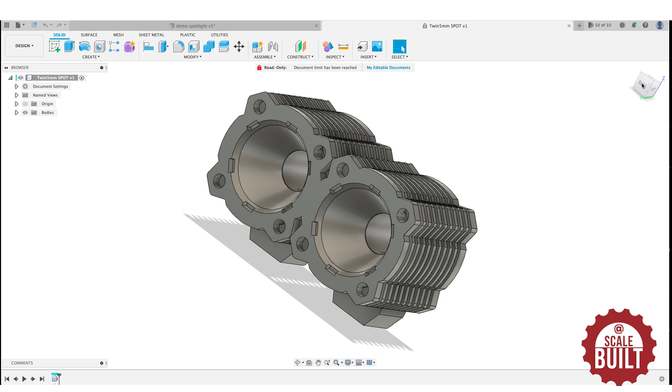Hi, so a few people have asked for some tutorials to make items in Fusion 360 that are specific to a remote control crawler. So I'll start with doing something similar to a spotlight, like this one that I made a while back.

So the easiest place to start is with the LED itself. This is a 5mm LED. I didn't make this file, it came off GrabCAD, and pretty much all 5mm LEDs have the same kind of dimensions, so it's a good starting point. So I'll import the LED file into the document as a reference point for later. But if we hide that...

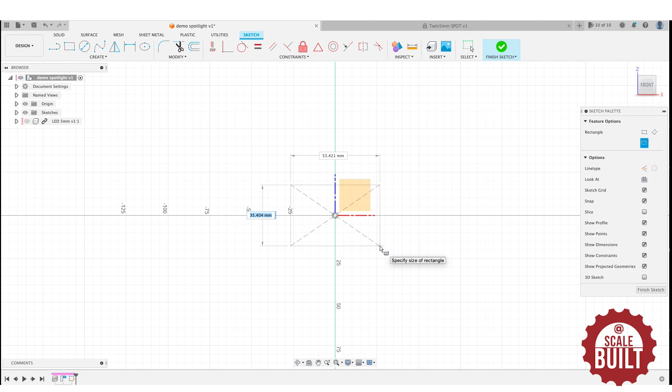What I'm going to do is start with just a rough idea of the housing. I'm going to create a sketch on the front plane, starting from the origin. We'll do a center rectangle, and we'll make that about 16mm squared ish. So you can see there's the LED just for scale.

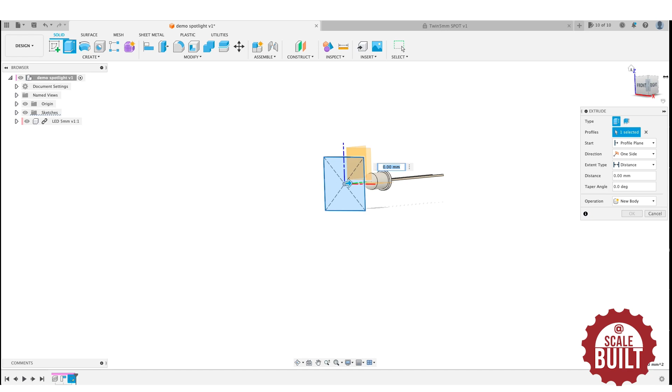What I'm going to do is extrude the box. We can always change bits of this later on anyway, so let's make it a bit less than that, maybe 15.

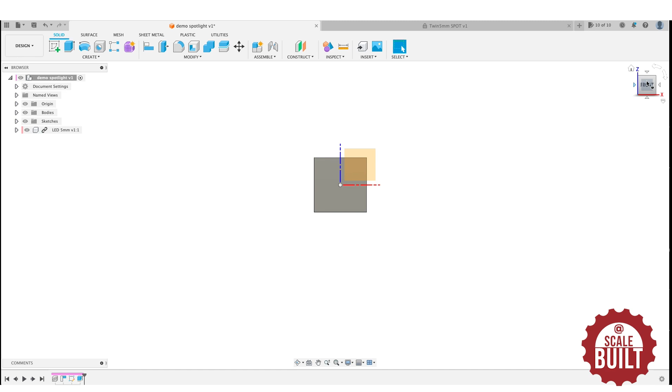So I've got the solid to start with, and then we want to give it some shape. I could have done this in the original sketch, but I'm just trying to do it as simply as possible, starting with a nice little block. I'll do another sketch on the block, and try to make it have some shape to it.

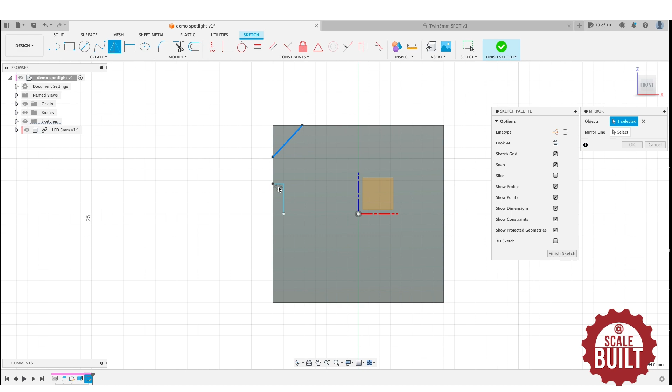I'll draw a line there. We're going to mirror all these things, so I only need to do this in one place. Right, so let's do a mirror of this, this, this, in that line. And let's do a mirror of this, this, this, this, this, and this in the horizontal axis.

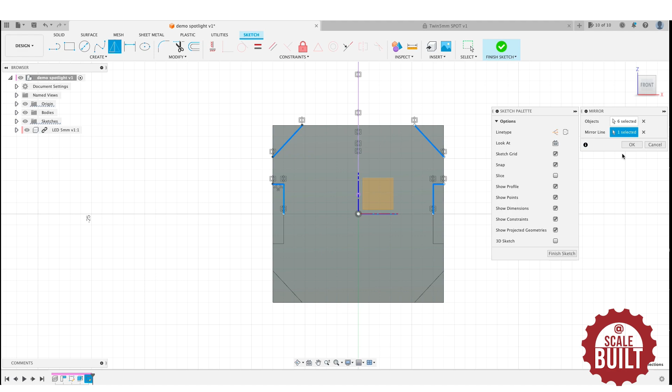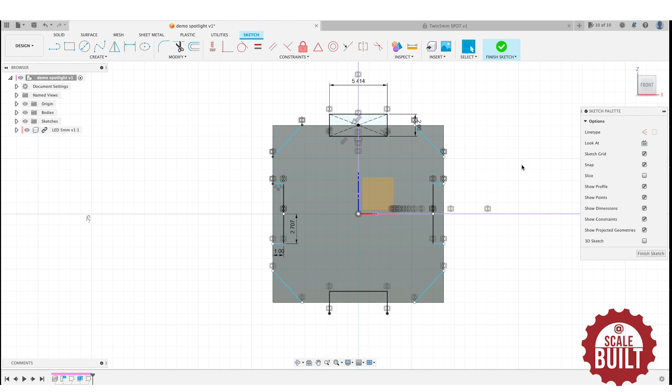We could do with that cutout up here as well. So if I get some dimensions, do a mirror. Oops. In the horizontal, got those. And then we can extrude all these cutouts.

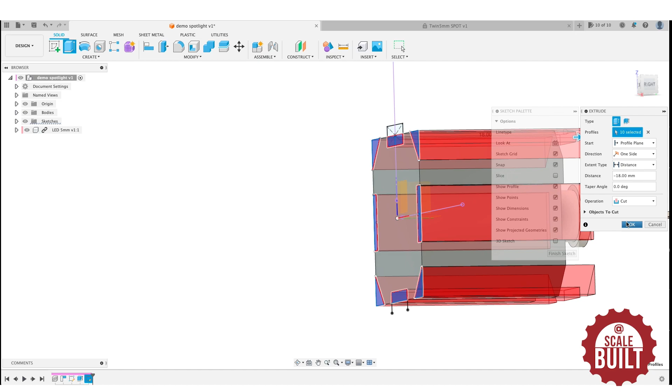It's got a little bit of shape to it now. And then what we're going to need to do is start making the cone cutout for the light to sit in.

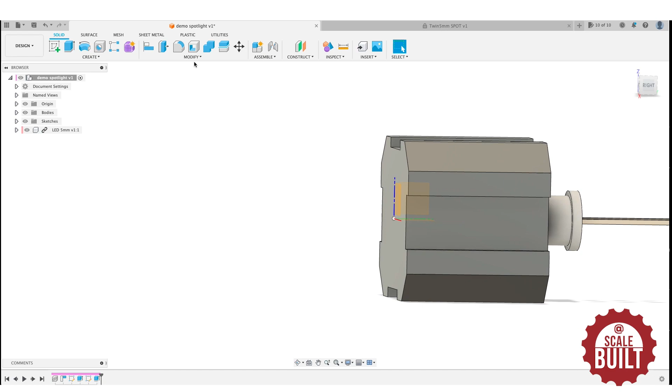So this is where it gets a bit trickier, and the easiest way I've found to do the cones and things for the reflector is to use the revolve tool. And for the revolve tool to work, we have to split this body in half. Well, you don't have to, but it's easier. So if I go to modify, split body, this is the body I'm going to split, and the tool I'm going to use, if I hide the body, is this plane that's on your origin here. So that one thing we made is now 2.

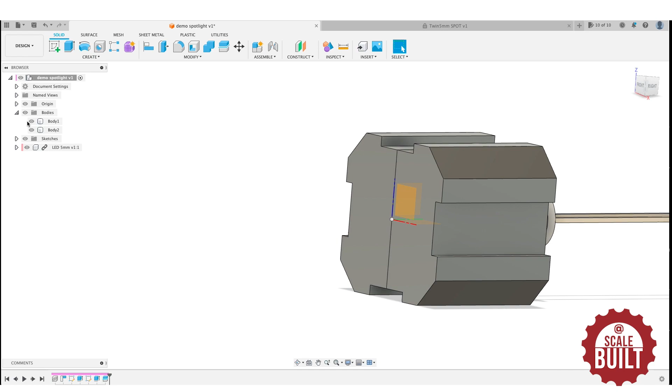And this is where I can start to roughly position where I'm going to have the LED. So if I move the LED, I'm going to want the LED to sit around there. So we're going to need to have a cone shape that comes all the way down here to where the flange of the LED is.

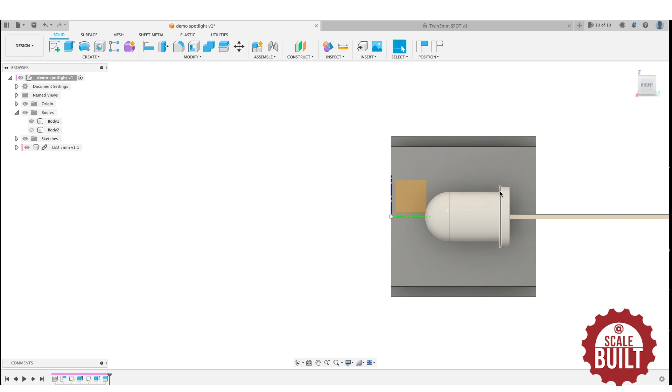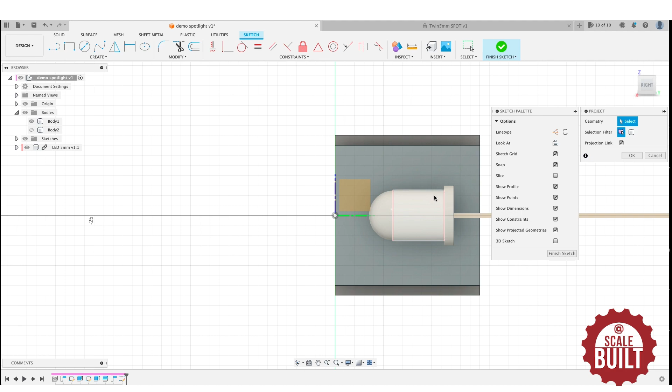So I'm going to do a sketch on this inside face of the housing to capture the positions. I'm going to project onto my sketch. Project just gives you an exact location of where other things are. So if I hit P on the keyboard for project, I can click on this bit of the LED and this bit of the LED. So I've now got on my sketch all these points which are representative of where the LED is.

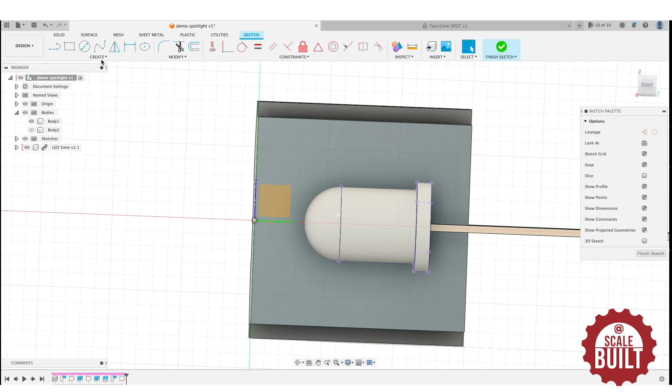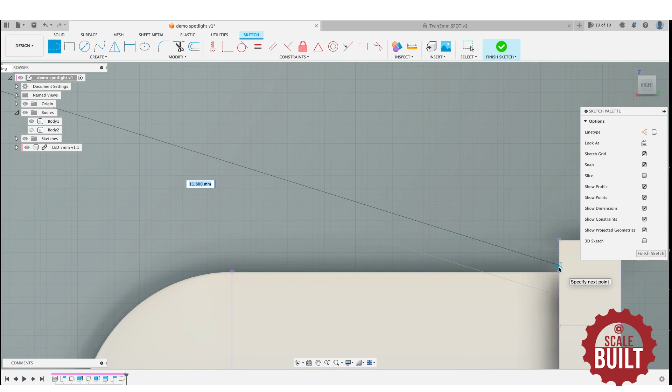And then I'm going to draw some lines. So here is the outside of the housing. If I start around there, and I'm going to want to come down to where these meet, but I'm going to just go out a little bit to have some wiggle room for the LED when I'm installing it. So click there.

Then I can hide the LED. I'm going to bring that down to there, to the midpoint. Click. Come to there. We don't need to, but draw a line there.

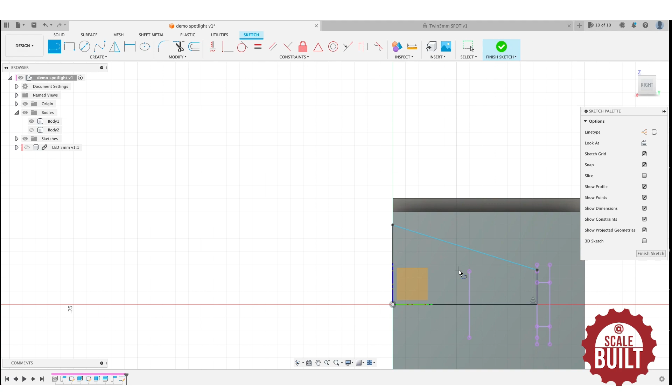So we've now got this shape here, which we're going to want to revolve around the x-axis. So when I finish the sketch, then do create, revolve, select the shape, and it's going to want to know what axis am I revolving around, and it's that one. Click that, and it does a revolve all the way around, and I've got it set to cut, so the revolve is going to cut into the existing body like that.

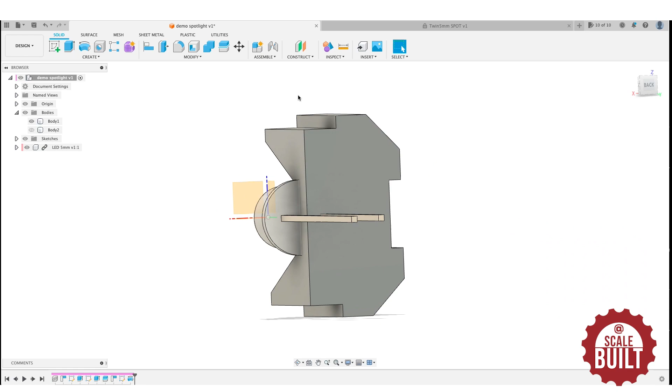Okay, so that's half of the housing at the moment. We're going to need to make the cutout next for the LED to actually slide into. So to do that, I'm going to do a sketch on the back, and I'm going to project the outer diameter of the LED.

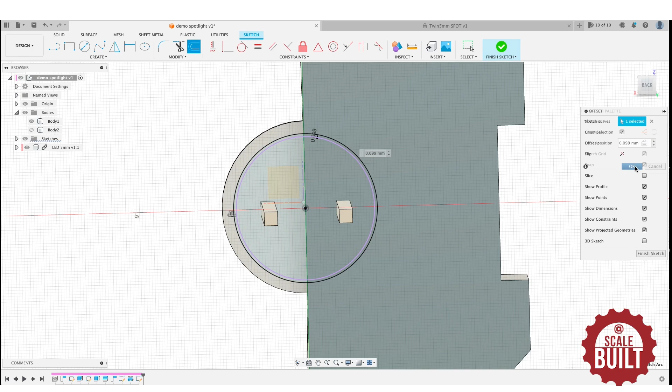So that is now an exact 5mm hole on the back, but just to take into account any errors with when it gets 3D printed, I'm going to offset that 5mm just a little bit, so I've got a little bit of wiggle room for when the LED goes in, like that. And then I'm going to extrude the slightly bigger circle that I've made.

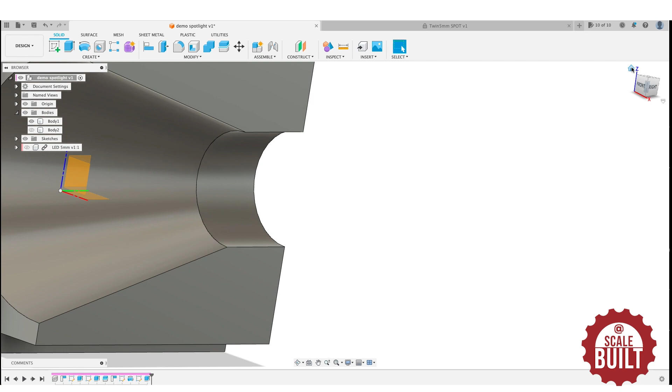Hide the LED, cut through the body like that. There we've got half of the light housing.

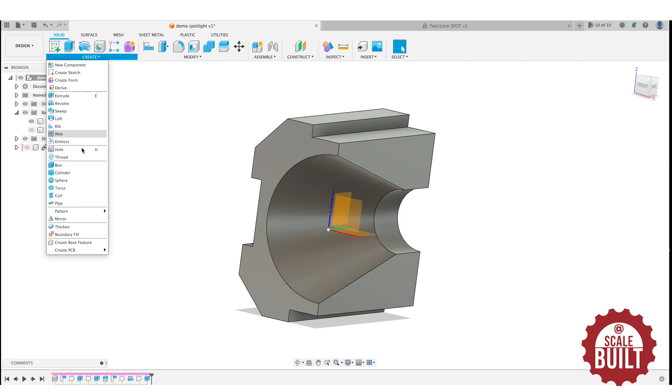But the other half obviously hasn't had that revolved onto it. So I'll hide the other half, and then I'll create a mirror of this body, select the plane, in that plane, join, and it makes a mirror image of that, so we've got the full housing there.

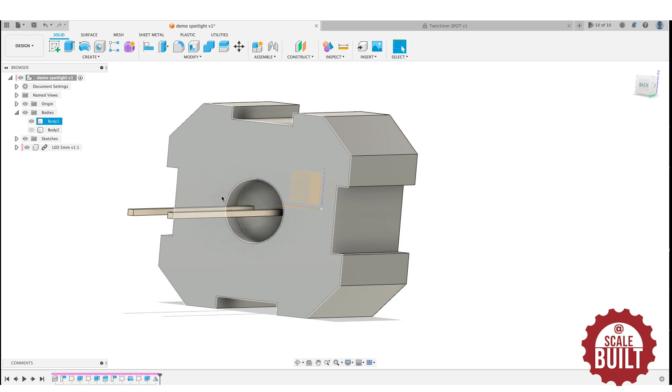Yeah, so the 5mm LED could go in there, but the LED obviously has a flange on it, and we want that to sit inside the body as well.

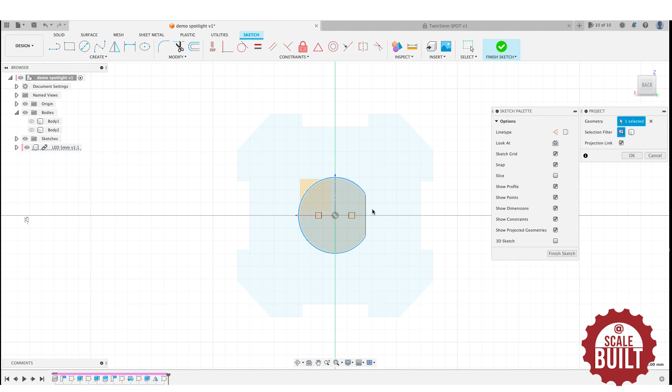So I bring the body back, I'm going to do a sketch on the back of the body. I'm going to project the outer shape of the LED, because I want that to sit inside when the LED gets slid in. I just want the hole to be perfectly circular instead of having this notch on it.

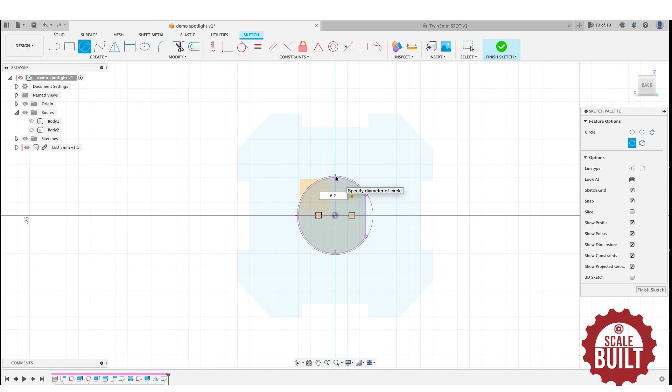So we'll do it to there, and that's 6 mil. So if I make it 6.2, so it's just a bit bigger, 6.25 maybe. Hide the LED. And then we're going to extrude this. I'm going to cut.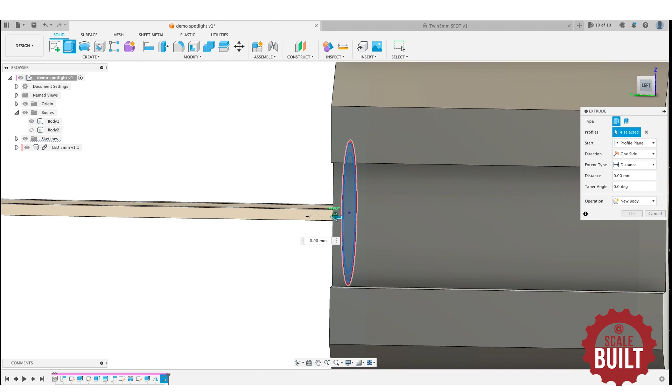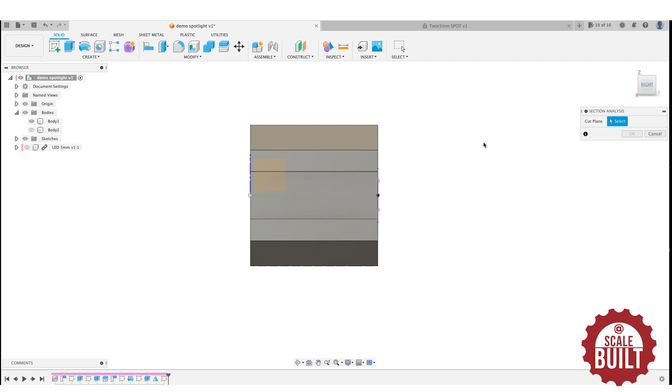Cut in just a little bit, but it's a bit hard to know how far we should be going. So what I should have done before I did that was do inspect section analysis, and section analysis lets you sort of look through an object like that. So it's not actually cut it, made any permanent changes, but it's letting me look through the middle of something. Okay, so we pull that back.

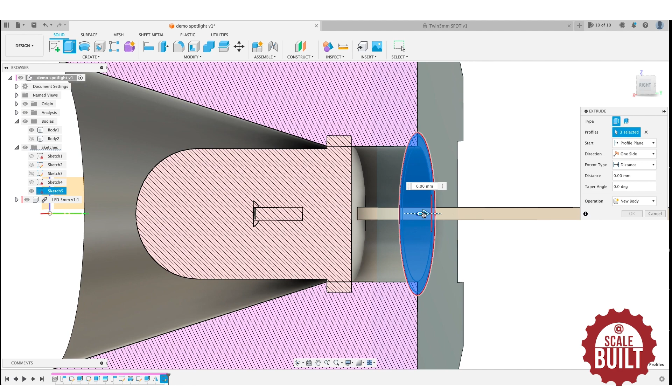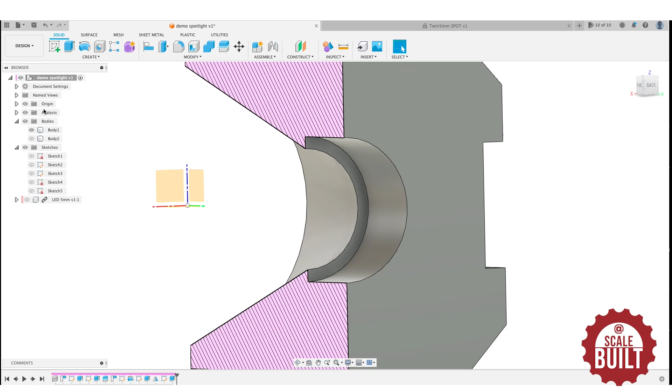We're going to pull it back to that face. If we hide the LED, we'll just be sure it won't cut that. So there you go. I can turn the section analysis off.

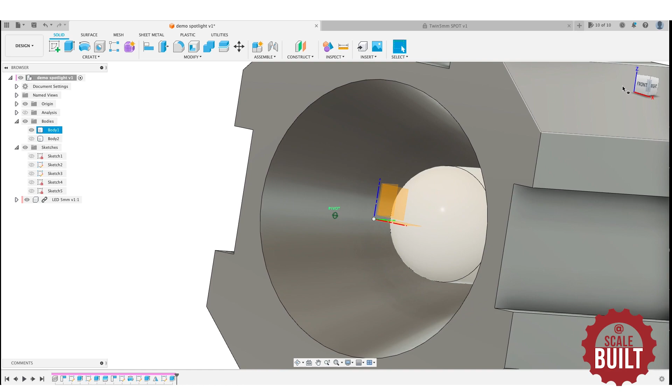So you've now got a bigger hole that the LED will slide into, and the flange will rest against this surface, and that's where the LED will poke through. Okay.

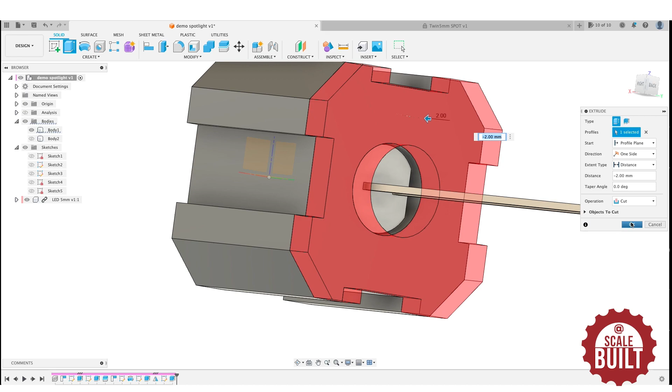If you wanted, you could reduce this gap here a bit. So we could go to extrude this face, and just pull it in a little bit, makes the spotlight a little less bulky, like that. And then what we can do is we can add detail to it if we want.

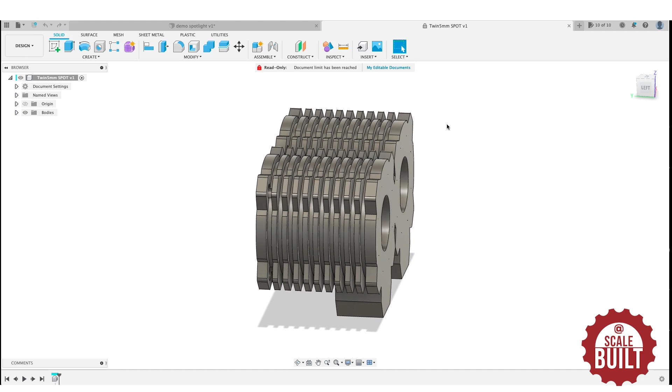So what's the best way to do that? We could make a separate face on here, or like we did on here, we could make cutouts to give it ribs.

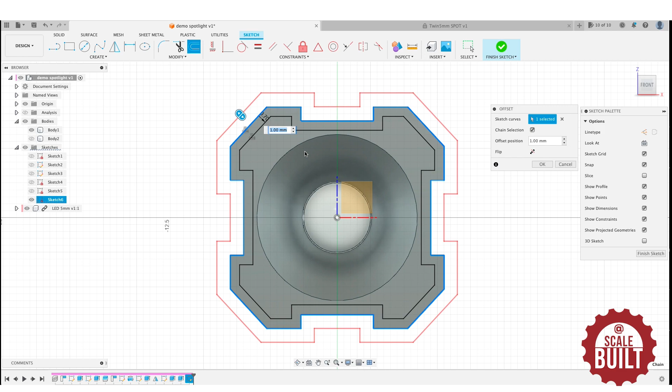So if I want to add some ribs on here, I start with a sketch on the front, then do an offset of this shape, going back about -0.7, meaning I'm cutting -0.7 into the main body. Then for simplicity, I do one that goes outwards about 1 millimeter, giving us this out shape.

What I could do is extrude this shape, making it 1 millimeter thick, and instead of joining it to the existing body, I'm going to make a new body. Then we can move a body, so I'll have the first one around there.

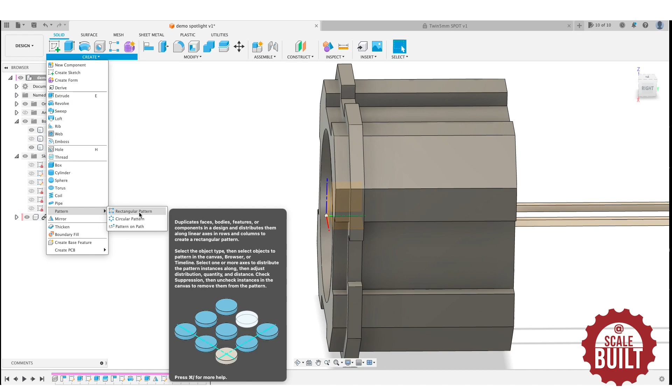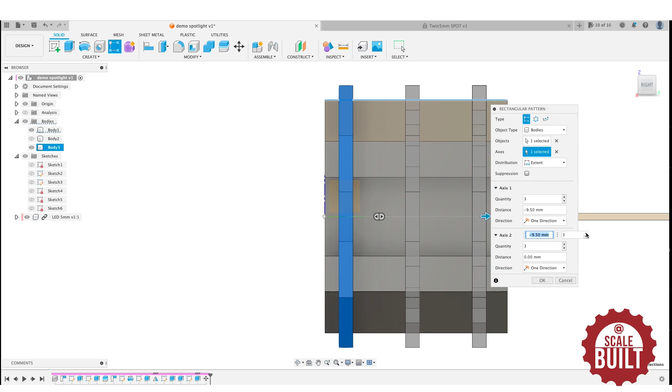Then create a rectangular pattern. I'm making a pattern of bodies, so you've got to select the body you want to pattern. The axis we're moving along is just any of them that go in this direction. How many do we want? Let's see, maybe 6 of them. So you've got those, which doesn't look too bad.

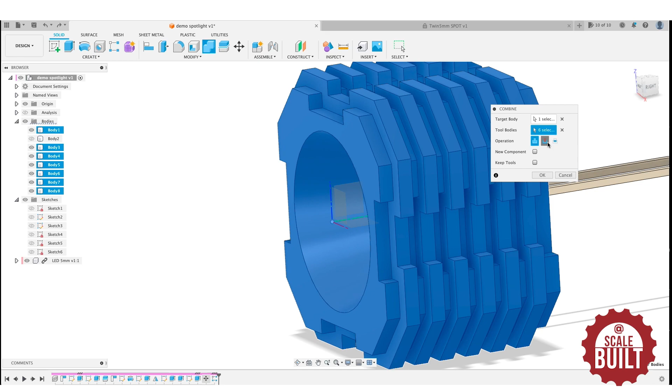But what I was actually going to do was use these bodies as tools to cut into the main body, taking these ribs away from it. So if I go to combine, the target body is this one, the tool bodies are all the ribs. What's the operation I want? I want to cut. If I press OK, there you go.

So that's the original body, the main housing, that's now had all those extra shapes we made taken away from it.

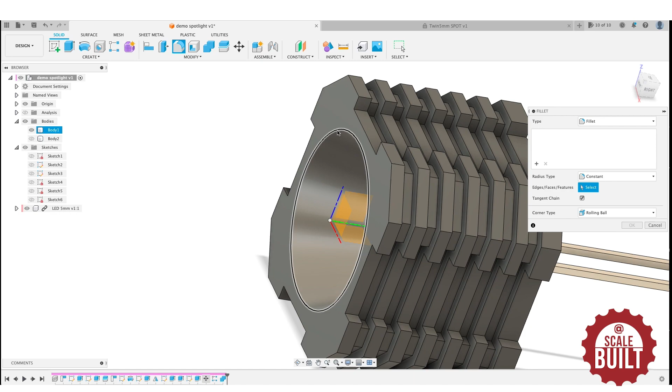What we could then do is give a little bit of detail to this front face. So if I round off this edge, I press the F key for fillet, click on there, and you can just pull this in a bit and get a rounded corner.

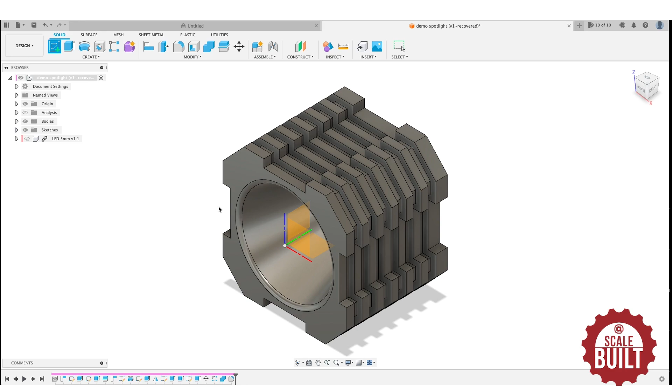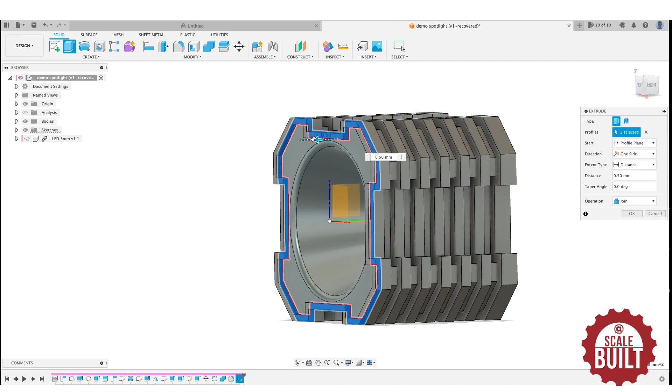So we'll add a bit more detail now to this face. If I do a sketch here, we'll do an offset to sort of give a little border. Hit the Q button to do a press pull on this, pull it out maybe 0.5 of a mil, and then hit F to do a fillet of that and round off the corners. There you go, that'll do.

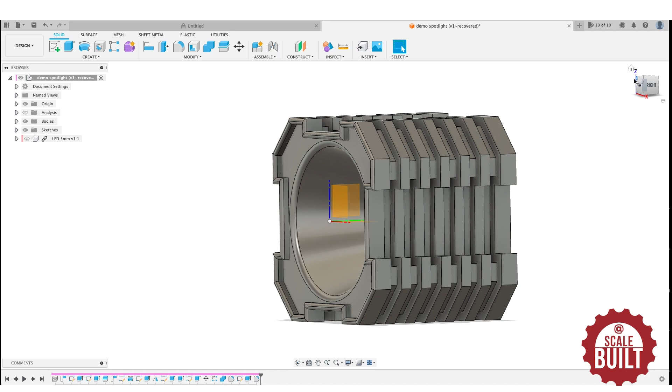So you got some rounded edges, and then we're going to add some pretend bolts here. If I do a sketch there, let's do a circle, somewhere around here. You could add loads of geometry to get it super exact, but it's so small no one's ever going to notice this. So let's make a bolt head right there, and add a hexagon inside to make like an Allen bolt.

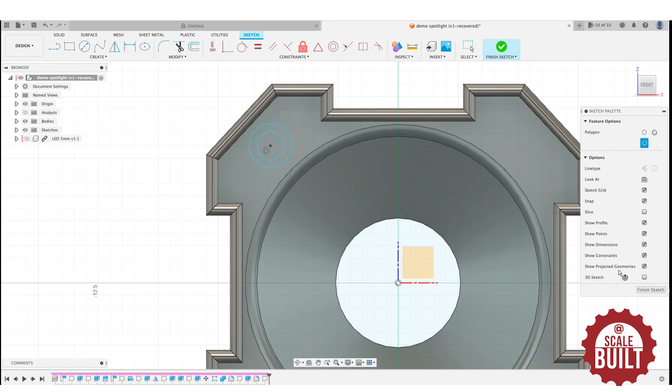Then hit the Q button to do a press pull. I'm going to pull this out about 1 millimeter. It's okay to do a join. So we've got one, and then a different way to mirror that is we want to do a mirror. We're not going to mirror a body, we're going to mirror a feature.

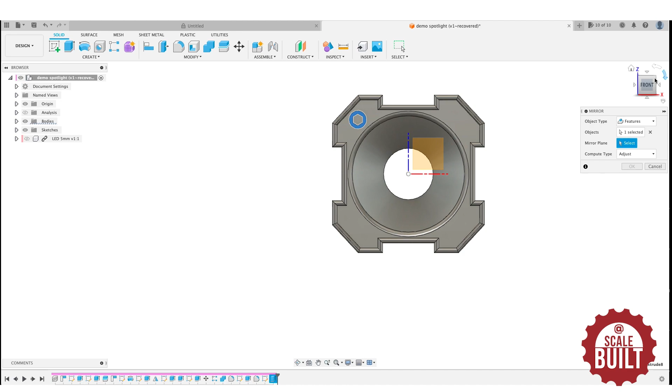The feature is on your timeline, this extrude, and we're going to mirror it in that plane there, so you get another one. Then we need to mirror both of those again in this plane. So create a mirror - again we're mirroring features, and the features are these two, the original extrude and the mirror, and we're going to mirror it in that plane.

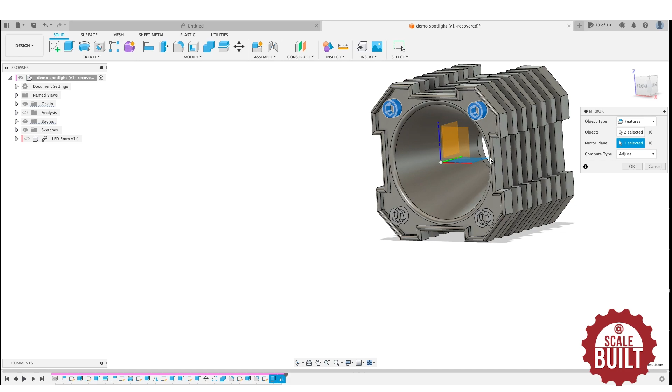Then we need to create some sort of plinth to let you screw this spotlight onto something. So we just hit save - Fusion crashes a lot, so keep saving.

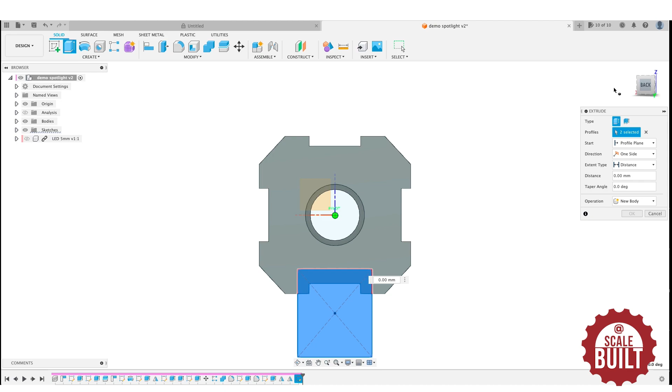So I'm going to do a sketch on the back. I'm going to make a rectangle along this axis, like that maybe. Do a press pull, let's have it going to there, and we'll make that a new body.

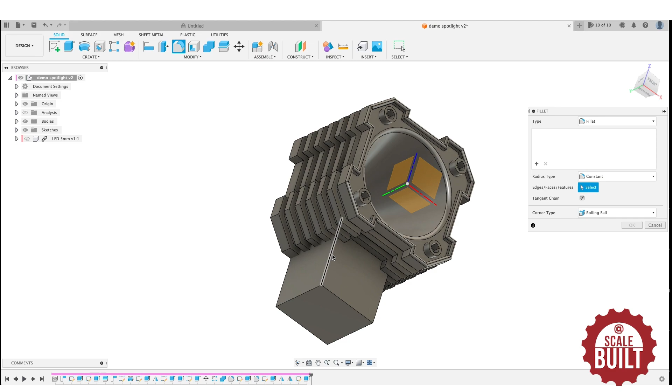And let's sort of round some of the corners. So F for fillet, click these two lines, the corners at the front, round those over like that. Should we do the back ones? We could do the back ones just a little.

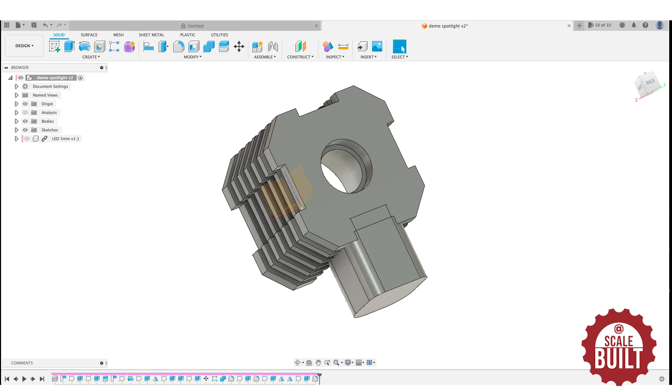Hit OK, we've got a little plinth. It's maybe a bit too tall, so if we hit E for extrude, click that face, and knock a couple of millimeters off.

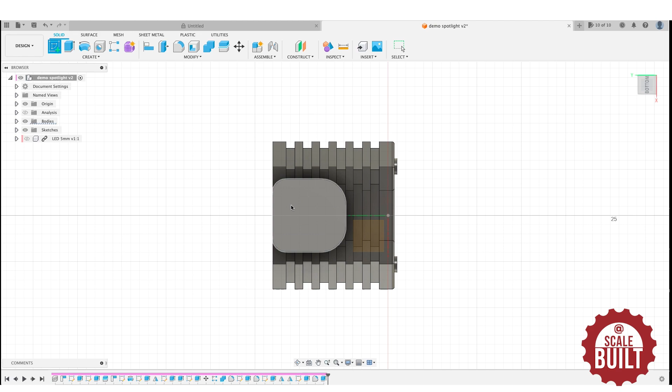And then we need to make a screw hole in here. So do a sketch, S brings up my shortcuts, circle, let's do a circle there. At this point it doesn't matter what size I'm going to do, but say you want to do a 3mm threaded hole in the base to screw into, just do any circle, doesn't matter the size at the moment.

Hit Q to do a press pull. How far up do you want it to go? I want it to go up a bit, but if we put on the analysis, you can make sure you're not going to send your hole up too far.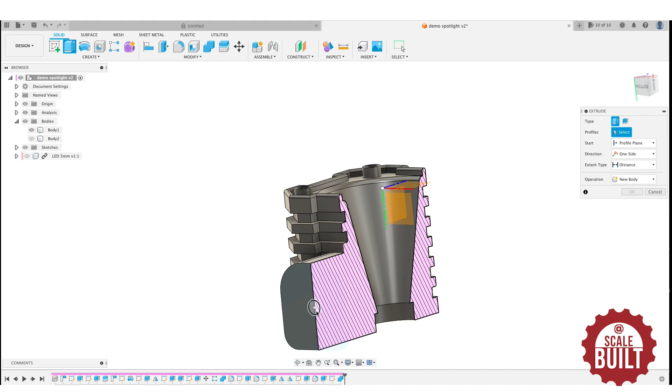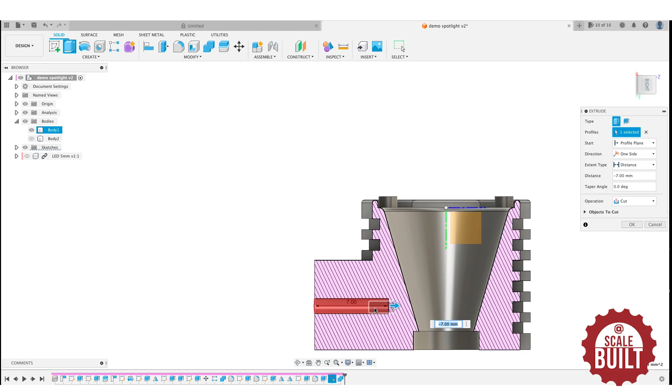So if I go back to this arbitrary circle we just sketched out, extrude, click the circle, we can safely go 7 or 8 millimeters without drilling through into the actual bucket of the light bar LED housing. So if we say 7 millimeters and it's on cut, OK, and we're looking at it with our analysis view on, so we're looking through the object, you've got that.

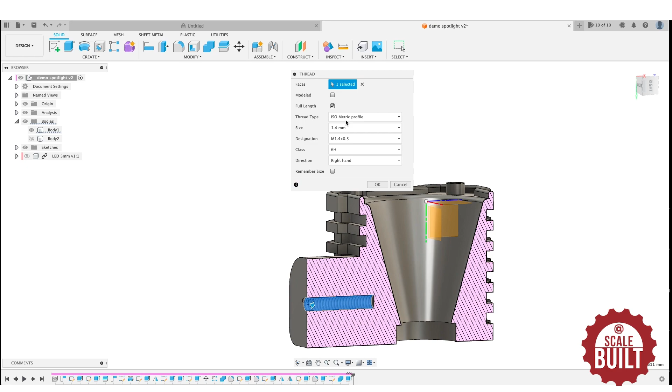And it's not threaded, so depending on what you're printing it in, you might want to create the threads. So I'm going to create a thread. You click on the face of the cylinder hole you've created, and over on this window you can say what thread you want to do. So for instance, if you want an M3 thread in there, you can change that to 3 millimeters. It makes the hole bigger to suit that size, and you can see the threads.

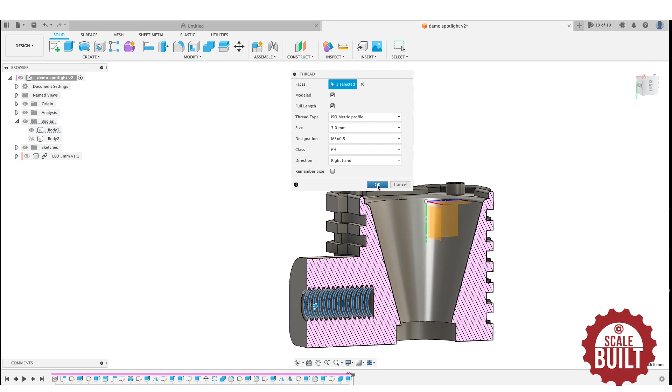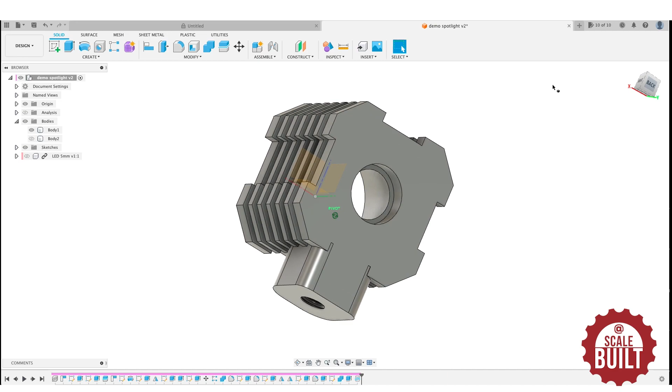Now if modelled is unticked, the threads aren't really there, and if you 3D printed this, it wouldn't print the threads. But I want modelled, so if I click that and hit OK, those threads are actually there in the STL file that can be 3D printed. I'll turn analysis view off, and you can see them in there. So I could use an M3 bolt to go into there, or you could make it an M2.5 or an M2, whatever you want. Let's just leave it at that.

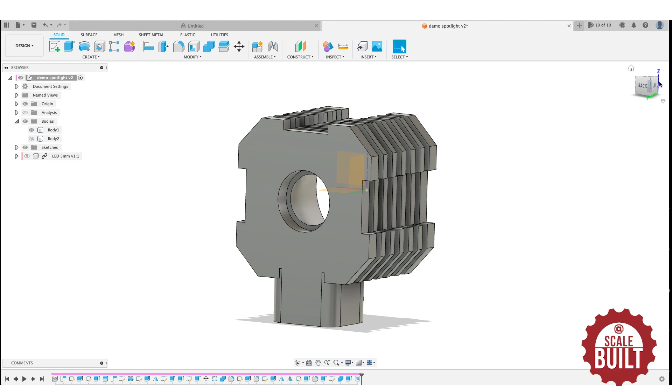And that is pretty much done, I think. So what I'd do is 3D print that, export the STL file and print it on a resin printer, then you could just slide in a 5mm LED, glue it in with some shoe goo or hot glue, whatever, and it'd be good to go.

Now if you want to do that, there's the body, right click on the body, save as mesh. I always have it at high quality, OK, and then you can export it as an STL file.

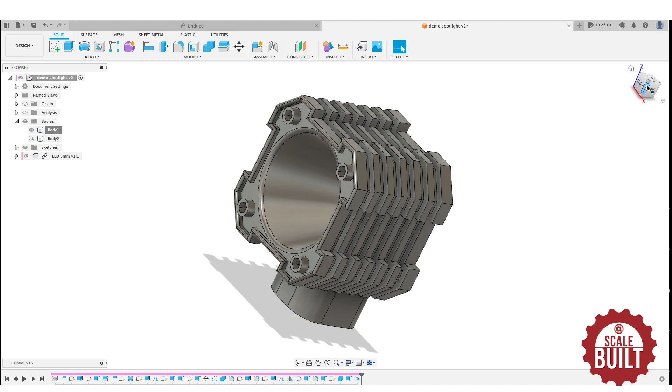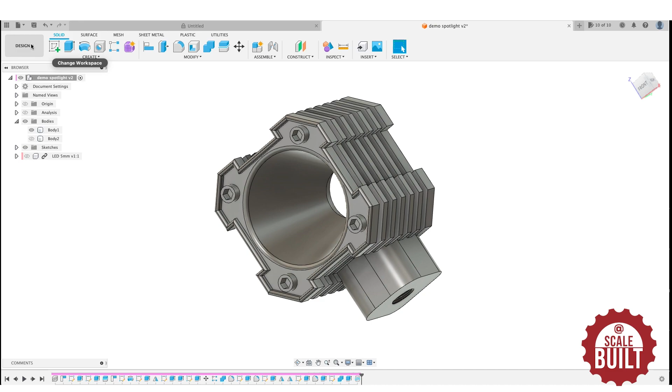And then I'd prime it, spray the whole thing black, and use a Molotow chrome pen to make the inside of the bucket chrome. Maybe do the bolt heads chrome, you could even do the ribs chrome. If you wanted to do that in rendering, you could, so you get a decent idea of what it'll look like. So if I do A for appearance, you can search for chrome, faces, and drag the chrome effect onto some of these faces.

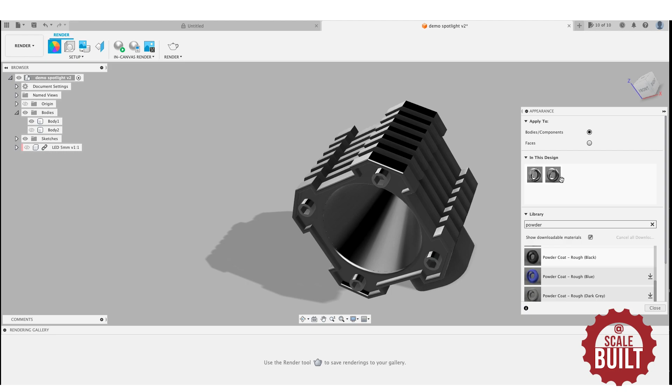Powder coat rough black, just download that. I want to keep the chrome appearance I've done to some of the faces. Let's make the bucket chrome.

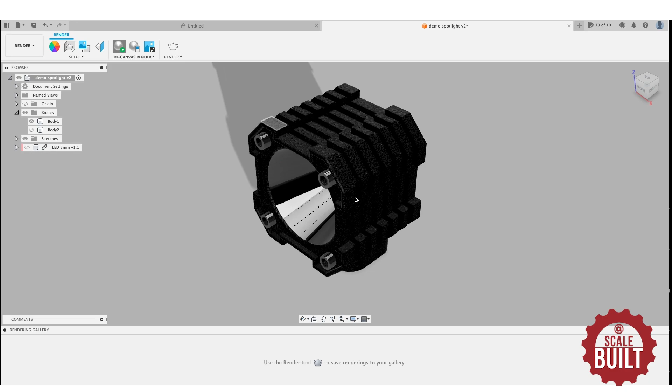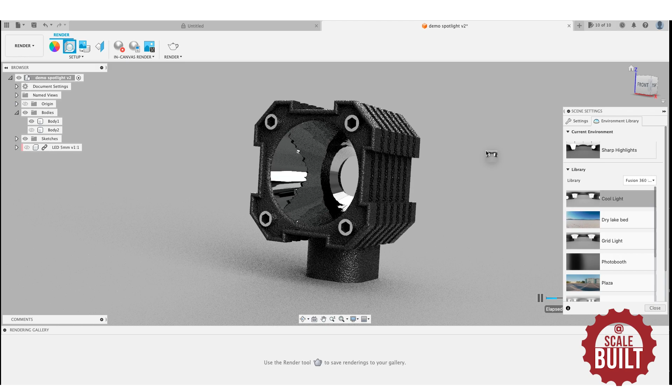If you do an in-canvas render, it's not the best example for colours because it's a bit hard to see. There you go. Takes a bit of time to do the renders though, so let's just knock that off.

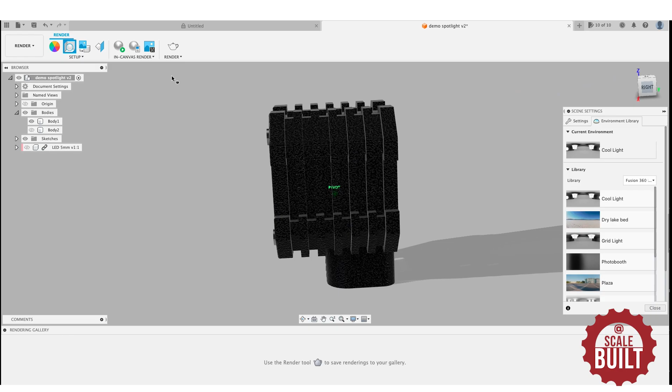That's it, hope that was useful. It's the first one of these I've done. Maybe I'll make the file available, I'm not sure yet. But yeah, hope you like that. Cheers.